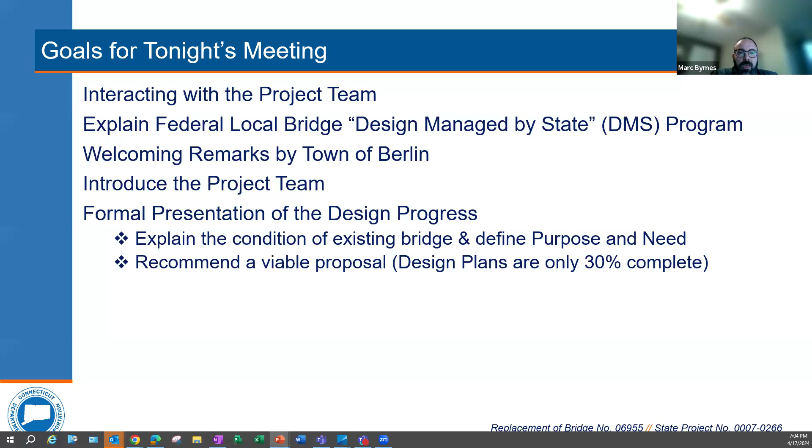The goals for tonight's meeting will be to interact with the project team, explain the federal local bridge program's Design Managed by State, or DMS, program. We'll have welcoming remarks by the town engineer, introductions of the project team, followed by a formal presentation of design progress, which will explain the condition of the existing bridge, define the purpose and need, and recommend a viable proposal.

Please bear in mind that our design plans are only at 30% complete, and we are still in the process of refining the design. Following the presentation, we'll have an open forum for your questions and answers.

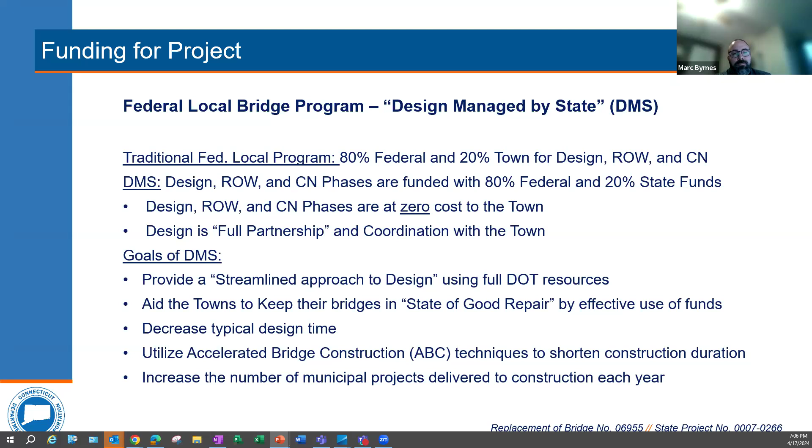I'll now turn it over to the town engineer, public works director, Mike Ahern from the town of Berlin. Mike.

Thanks, Mark. Again, I'm Mike Ahern, town of Berlin public works director and town engineer. When I first started getting involved in this project, the town actually had a rehab approach to the project. Then, during the process with the Army Corps and the state agencies, we got comments and concerns about that approach. Then Tropical Storm Ida hit the bridge, and it rapidly became a full bridge replacement project over time.

I'd like everyone to know that the activity some of you folks might have seen at the bridge starting in December 2021 and early 2022 was focused on emergency repairs to stabilize the bridge so we can take this bridge through design, permitting, bidding, and ultimately into construction. So that activity was really focused on stabilizing the bridge as it is right now.

Any questions that anyone has are welcome, as Mark said, to send in or call in. Even after this, you can call my office or some of the members of the engineering team to get some answers. So with that, I'll turn it back to the engineering team so they can get into some of the details. Thank you. Great, thank you, Mike.

I'll now introduce the project team from the department and from CHA, Clough Harbour and Associates, who is our department's consultant liaison. Our division chief is Bart Sweeney. Our unit's principal engineer is Derek Lassard. As I said previously, I'm Marc Byrnes, the project manager. Project engineers are Michelle Rain and Jeff Organak. From the department's Office of Rights of Way, Zachary Guarino. And from CHA are Anand Sasadri and Stephanie Dubina.

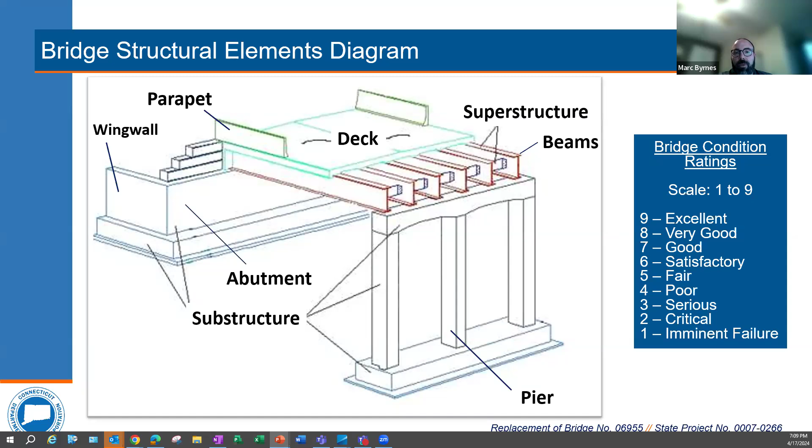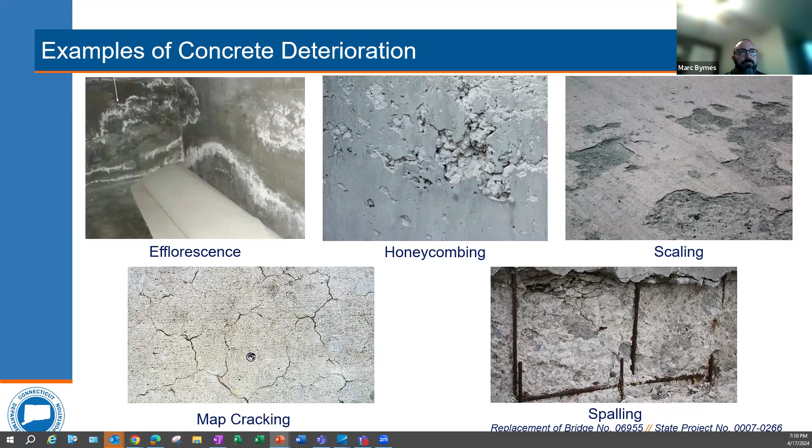Thank you, Mark. So tonight we'll be specifically talking about state project number 0007-0266. It's the Glen Street Bridge over the Mattabesset River, bridge number 06955.

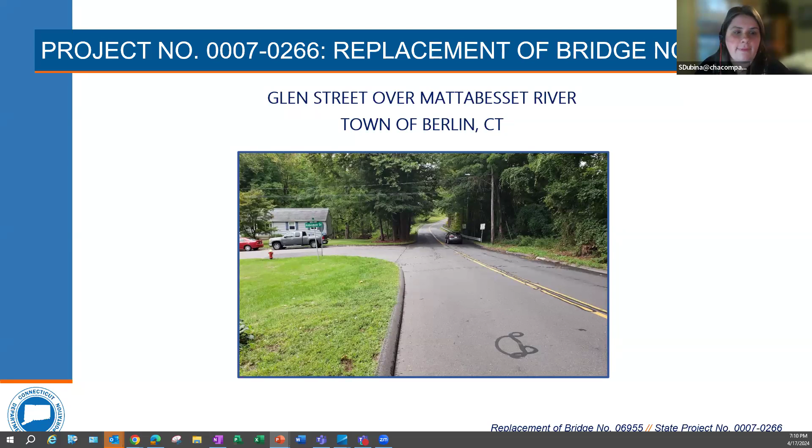This is some existing bridge data for this bridge. The roadway width of Glen Street is 24 feet wide. It has an average daily traffic count of 805 vehicles. The speed limit is 25 miles per hour; that's the design speed, while the 85th percentile speed is 43 miles per hour. Glen Street is classified as an urban local roadway.

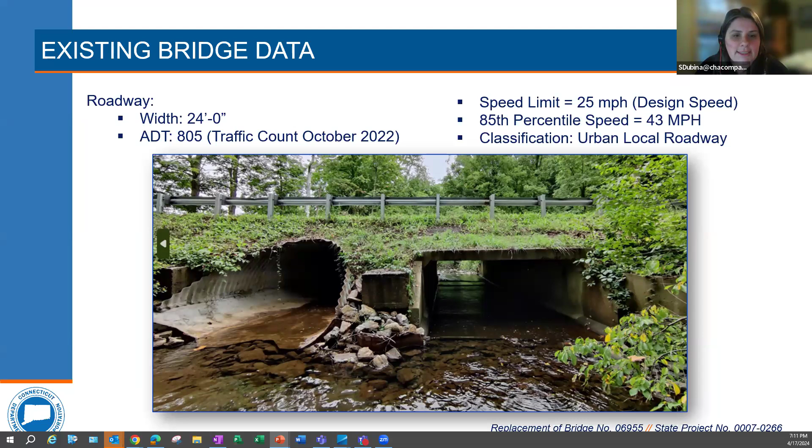Some additional bridge data: this bridge was constructed in 1957. It's 67 years old. It has 2 spans. The southerly span is a 12-foot by 5-foot rise by 46-foot long precast concrete box culvert, while the northerly span is an 11-foot 7-inch span with 7-foot 5-inch rise and 52 feet long corrugated steel pipe arch.

As Mike mentioned earlier in the presentation, there were some emergency temporary repairs conducted by the town in 2022. Those were primarily for the corrugated steel pipe arch, and they included a 5-inch concrete invert liner, steel sheeting that acts as cutoff walls at both the inlet and outlet, and riprap along the stream bed at the inlet and outlet.

Looking at hydraulics, this bridge is considered to be hydraulically inadequate based on the 100-year storm. Hydraulic adequacy can be measured in several ways. Horizontally speaking, the clear span of a bridge is measured from one end of the culvert to another. In this case, the clear span of this bridge is 23 feet 7 inches, which is much less than the 1.2 times bank full width of 27 feet.

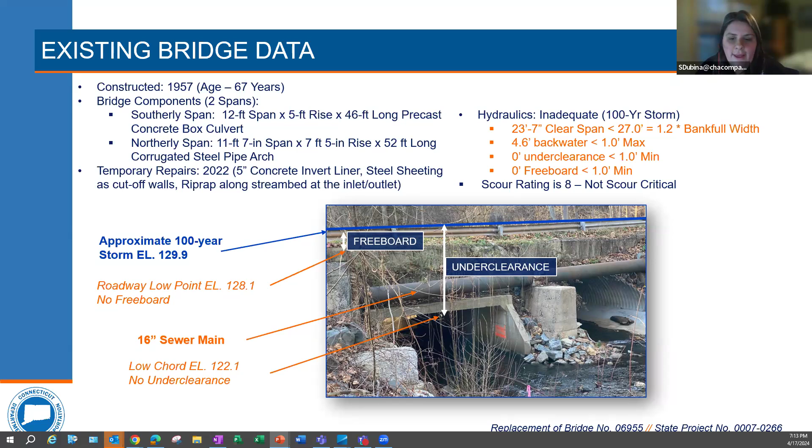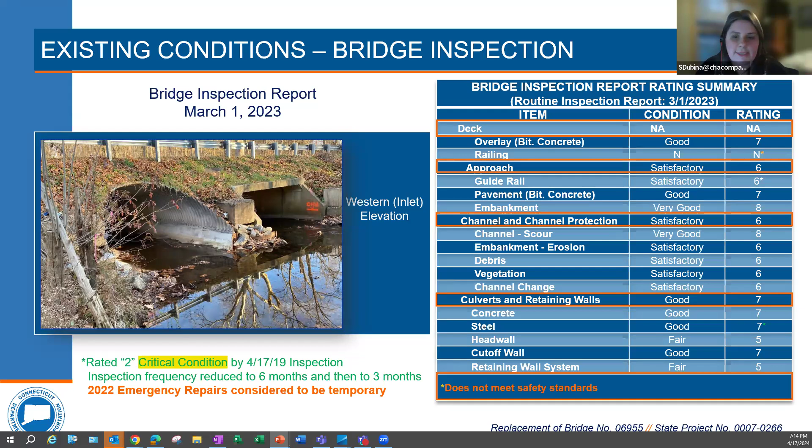Another issue with this bridge is that the load rating is substandard. There's a 7-ton weight restriction on the bridge.

I'm going to move on to some site photos of the bridge itself. The top left photo is the eastern outlet elevation of the bridge. You can see this has a 16-inch sanitary sewer main attached to the bridge fascia. This is a major design element for this site. The top right photo is the western inlet elevation view of the bridge.

This bottom left photo is Glen Street looking north. This arrow points to where the Robindale Drive intersection is, further to the east. And this bottom right photo is Glen Street looking south, and this arrow points to the driveway of 85 Glen Street.

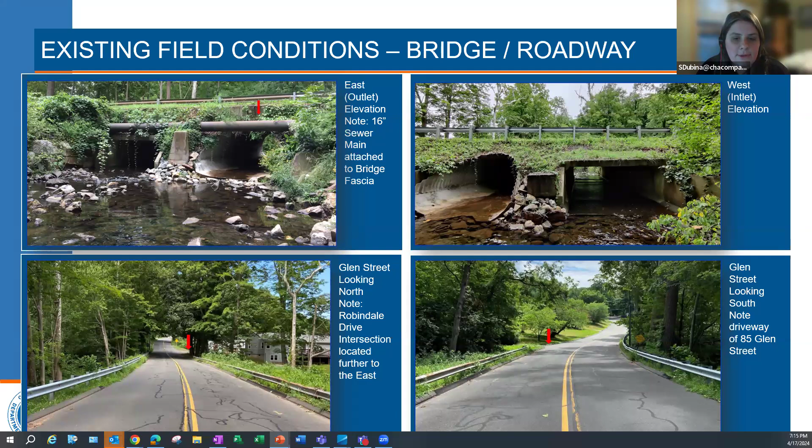Here are some photos of the structure itself. This is an inside view of the concrete box culvert. This top right photo shows misalignment of the roof sections of this culvert.

The bottom left photo is an inside view of the corrugated steel pipe arch culvert. If you look closely, you can see the concrete invert liner that was installed in 2022. And this bottom right photo is the condition of the corrugated steel pipe arch and its bolt connections.

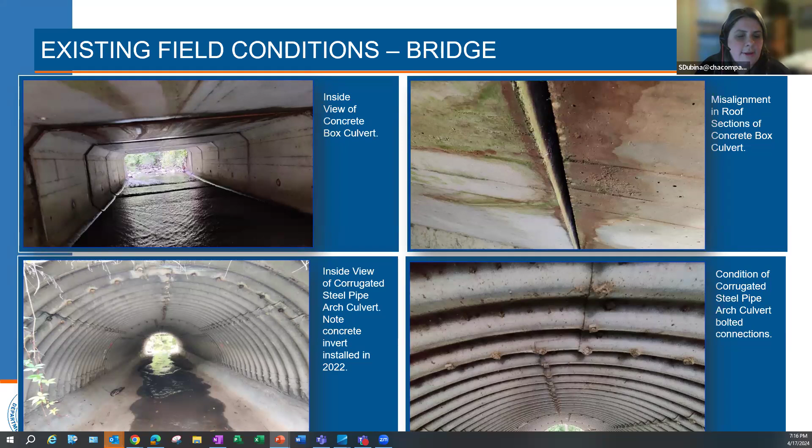This top left photo is the condition of the concrete southeast wing wall. This top right photo is the inlet of the precast concrete box culvert. This bottom left photo...

This is taken from Glen Street on the roadway looking down at that sanitary sewer main attached to the bridge fascia. And this bottom right photo shows some of those emergency repairs from 2022. It shows riprap and scour protection in front of the corrugated steel pipe arch.

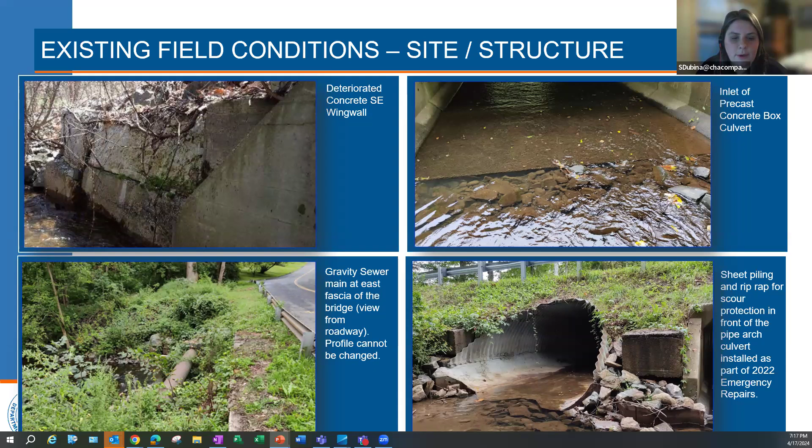So based on the existing conditions of the bridge and analysis, we have come up with the project's purpose and needs. The purpose for this project includes eliminating the weight restrictions, increasing the roadway width to provide a dedicated 5-foot minimum bicycle, pedestrian lane, and pedestrian path per the town's request, and to replace the bridge rail system to meet current MASH standards.

Needs for this project include maintaining sanitary sewer service during construction, setting the bridge's low chord and proposed sewer main invert to the same elevation of 123.4 to avoid sewer main redesign, to improve the bridge's hydraulic performance overall, and to provide freeboard and eliminate overtopping.

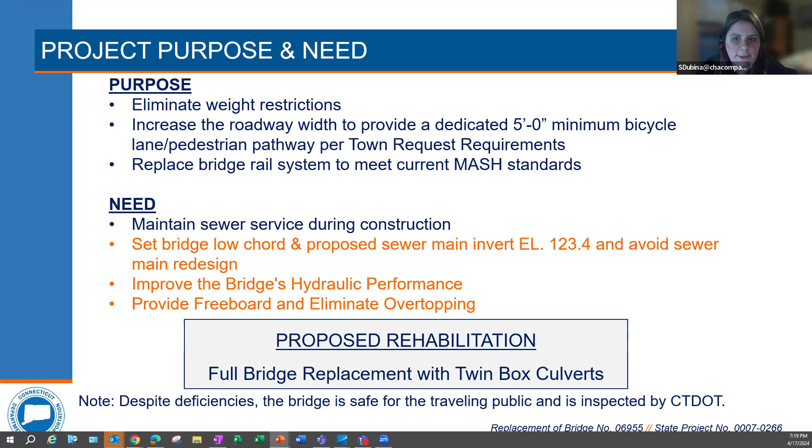Here's a list of the proposed improvements for this bridge with the new twin precast box concrete culvert. The bridge will carry AASHTO design, legal and permit vehicles, and will therefore eliminate weight restrictions on the bridge. A 24-foot wide roadway will be provided with a 5-foot minimum bicycle pedestrian lane.

The service life of the bridge will be 75 years and it will have minimal maintenance. This type of bridge is generally easier to construct and maintain over time. An open bridge rail system and approach rail system will meet current safety standards. We'll have several hydraulic performance improvements as well.

This 40-foot clear span will meet 1.2 times the bank full width. The reduced backwater will reduce backwater elevation from 4.6 to 1.2 compared to natural conditions. It will eliminate roadway overtopping, which is the most significant hydraulic improvement at this site, during a 100-year storm event. And that will actually provide 1.5 feet of freeboard.

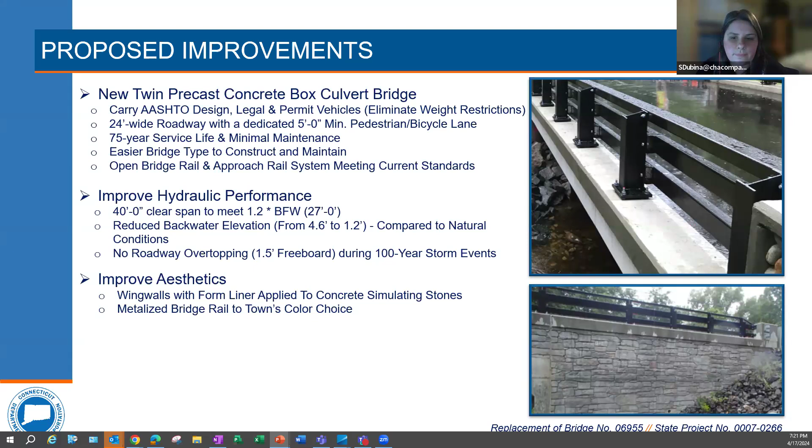I'm going to now move on to some of the bridge drawings. This is the proposed bridge cross section, looking north as if you're looking towards Robindale Drive.

The bridge will carry 2 10-foot travel lanes, 2 2-foot shoulders, and on the western side, have that 5-foot minimum bicycle pedestrian path. There will be an open bridge rail system. The bridge will be supported by the twin box concrete culverts in orange here. The sanitary sewer system will be set at the same low chord elevation as the existing, which is in purple here. Overall, the culverts will protect the sanitary sewer from storm events.

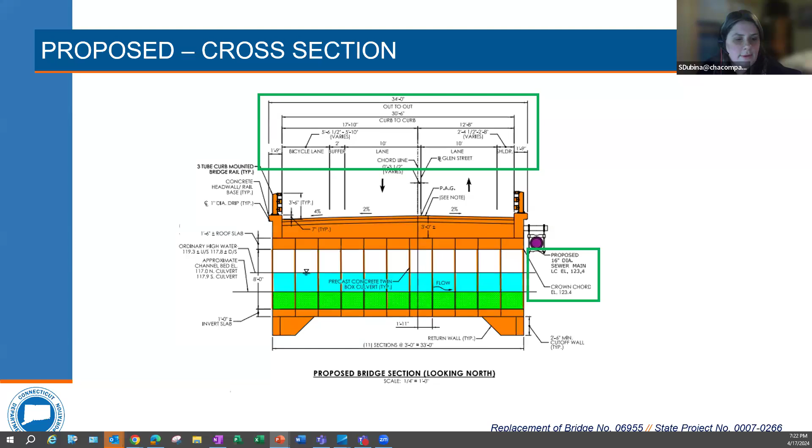This is the proposed bridge elevation. This is an eastern elevation of the bridge. So again, in orange are the two twin box concrete culverts. The northern culvert will be 20 feet wide with an 8-foot rise and 1.6 feet of natural stream bed material. This will act as the main flow channel for the Mattabesset River. While on the southern side, the culvert will be 20 feet wide by 5 feet 6 inches tall and no stream bed material.

Again, that sanitary sewer main will be attached to the bridge fascia at the same elevation as the existing. The gray represents the wing walls that will contain the roadway. We have the open bridge rail system above that. And here you see that 1.5 feet of freeboard is provided for the 100-year design storm, which is the main reason why this type of structure was chosen at this site, because it provides the freeboard.

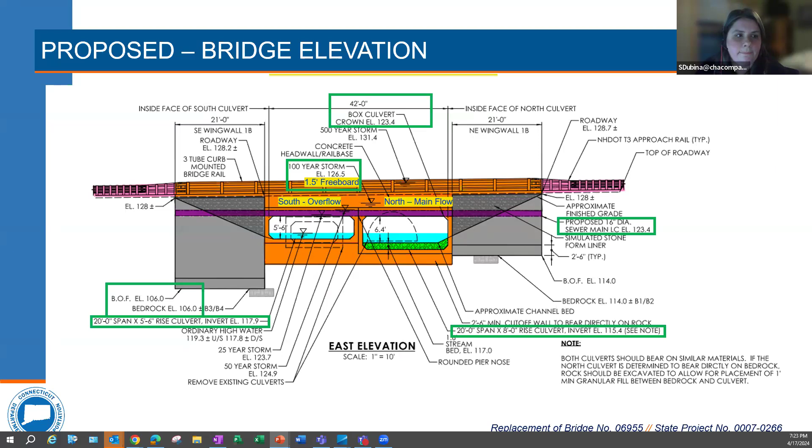This is the proposed bridge plan. So to orient you, Glen Street runs from north to south. The Mattabesset River flows from west to east. The orange are the two 20-foot wide concrete box culverts. The gray are the wing walls. The purple is the proposed sewer main attached to the bridge fascia.

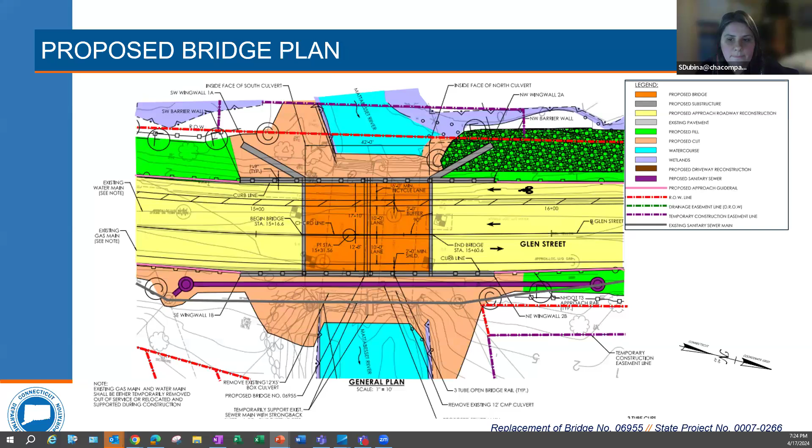This is the roadway plan. So again, Glen Street runs from north to south. The Mattabesset River flows from west to east. The project will begin with roadway reconstruction in the yellow after the driveway of 95 Glen Street, and will be reconstructed up almost to the intersection of Robindale Drive. It'll end before the Robindale Drive intersection.

There are some drainage improvements along with this project. So on the west side of the roadway, there are 2 catch basins that will be installed that will discharge stormwater into the channel upstream. And the outlet north of the bridge will be modified to a 24-inch pipe, and riprap will redirect stormwater discharge away from the northwest embankment to the channel upstream through a drainage swale. In addition, I'd just like to note that this northwest embankment will be protected by riprap.

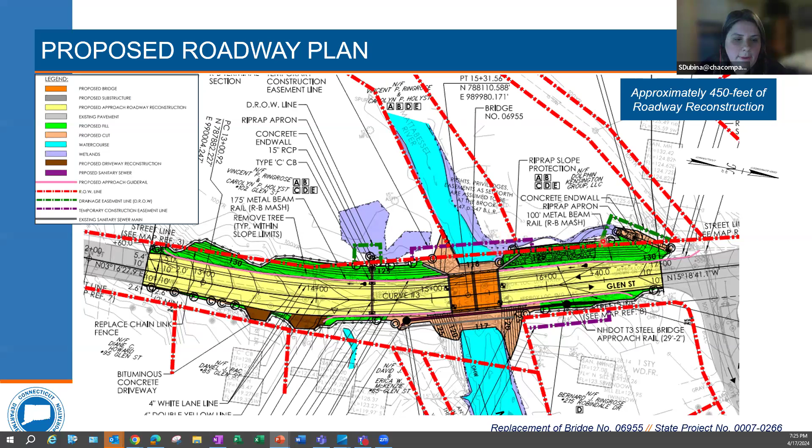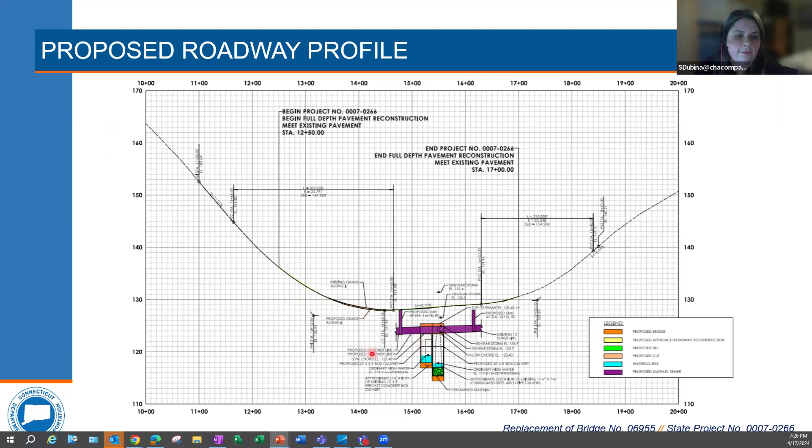This is the proposed roadway profile. It's an exaggerated scale, but we just wanted to pull this up to basically show that the profile of the roadway will not change for this project. So this is our detour routes. The Glen Street Bridge is located here in this circle. The bridge will be closed during construction. There are 2 relatively short detour routes that are available. Ultimately, the town will decide which one is best suited for the needs of the public.

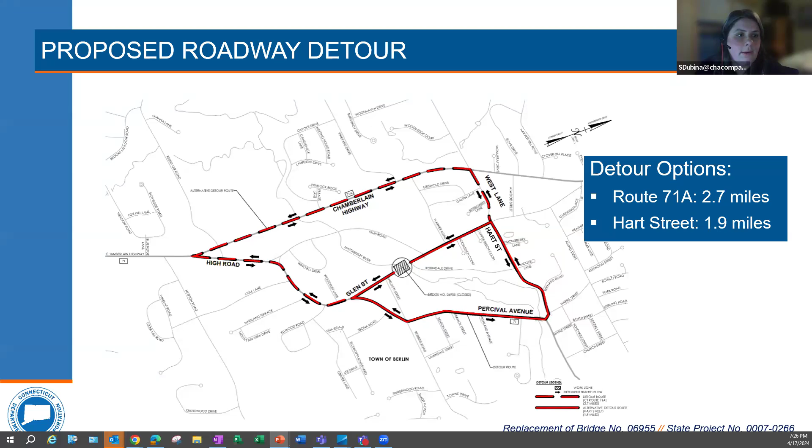So as previously mentioned, there are some utilities on the bridge. That 16-inch gravity sanitary sewer main will be temporarily supported and maintained during construction. There will be a 1 foot westerly shift of the bridge's alignment to avoid any conflict with that sewer main during construction. The proposed sewer main will be supported by the new bridge, and the bridge's low chord elevation will be set to match the existing sewer main invert. This will avoid any major redesign or reconstruction of the sewer main itself. And as previously said, the culverts will protect the sewer main from any storm events in the future.

In addition to the sanitary sewer, there is a gas main and a water main below Glen Street. These will be temporarily relocated and maintained during construction. And while there are some utility poles around the bridge, there are none that cross the bridge, and there are no impacts to overhead utilities at this site. And we'd just like to note that the residents' utility services will be maintained during construction.

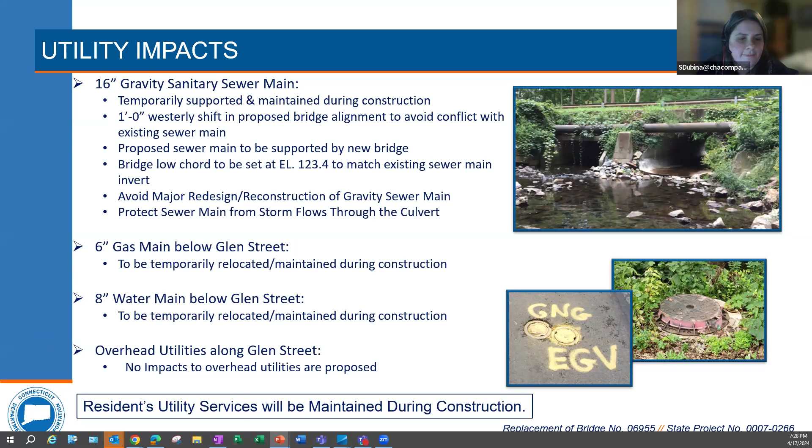Moving along to environmental and historical impacts, there are no significant environmental impacts proposed with this project, and there are no historical impacts. There are a few anticipated regulated permits. Those include the Town of Berlin Inland Wetlands Permit, the Connecticut DEEP Flood Management Certification, and the U.S. Army Corps of Engineers Self-Verification Registration.

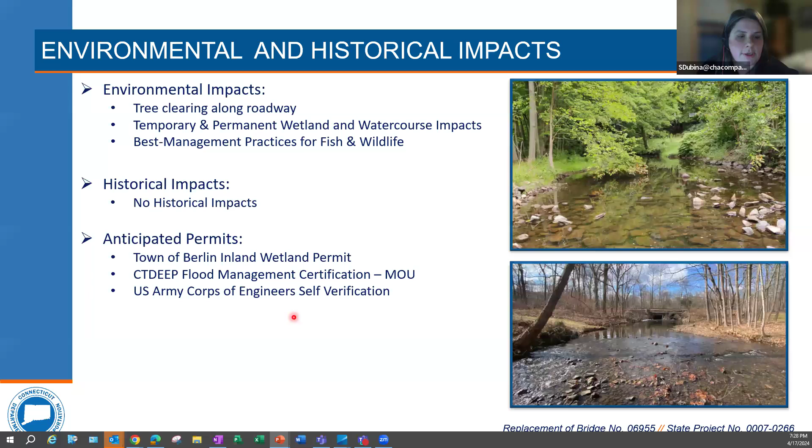There are a few rights-of-way impacts with this design. To orient you again, Glen Street runs from north to south, and the Mattabesset River flows from west to east. Looking on the western side of the roadway, there are permanent slope easements here in green, and drainage rights-of-way easement highlighted in green here and here, and a temporary construction easement in purple. Moving on to the eastern side of the roadway and bridge, there is one temporary construction easement proposed northeast of the bridge on this first property on Robindale Drive.

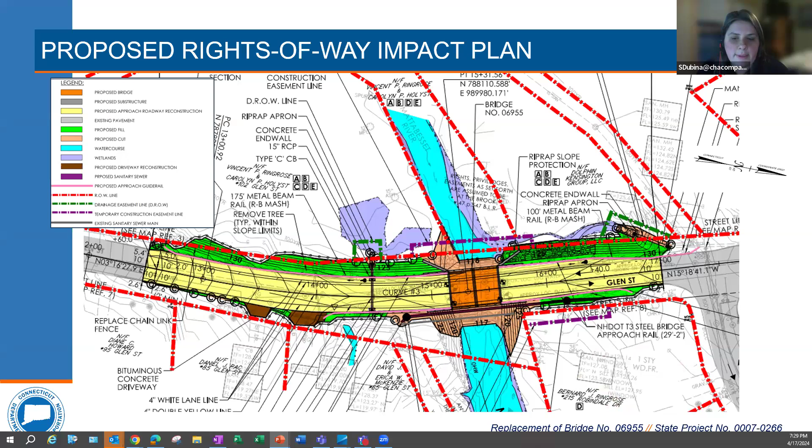And with that, I'm going to pass it along to Zach from the department's right-of-way unit to discuss the rights-of-way process. Thank you, Stephanie. My name is Zachary Guarino, and I'm a project coordinator with the department's Division of Rights-of-Way. Our office is responsible for acquiring property rights that are needed for transportation projects. As mentioned in the presentation, this project will require the acquisition of property rights, so I'd like to give a brief overview of our acquisition process.

Before I begin, I'd like to mention that the specific impacts are still being finalized, and they may change as the design progresses, and that any required property rights will be acquired in accordance with Connecticut General Statutes, sections 13a-73 and 13a-98e, as well as the Uniform Act. You can go ahead and change the slide.

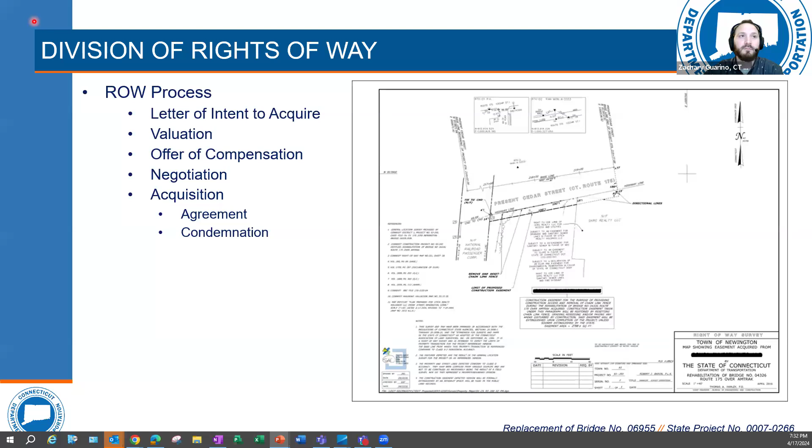Looking at the project schedule and cost, construction is set to begin in the spring of 2026, subject to regulatory permit approvals. We anticipate a one-season construction duration, approximately 8 months. The construction cost is $3,510,000, and as Mark mentioned at the beginning of the presentation, that's with 80% federal funds and 20% minimum state funds, at no cost to the town. We'd just like to note that the cost and schedule are preliminary, so they may be subject to change.

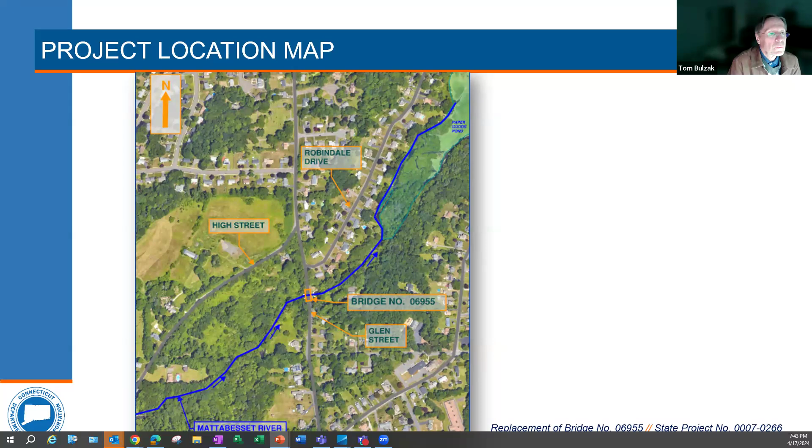If the water flow to Paper Goods Dam is slowed down, I don't think there is going to be any slowing down of the water. The amount of water that is coming to the bridge, leaving the bridge, and continuing towards the Paper Goods Dam is going to be the same. As I stated previously, the amount of water is a function of the watershed's response to the rain event. There is no significant change in how that water is moving through the crossing under the Glen Street Bridge. Thank you.